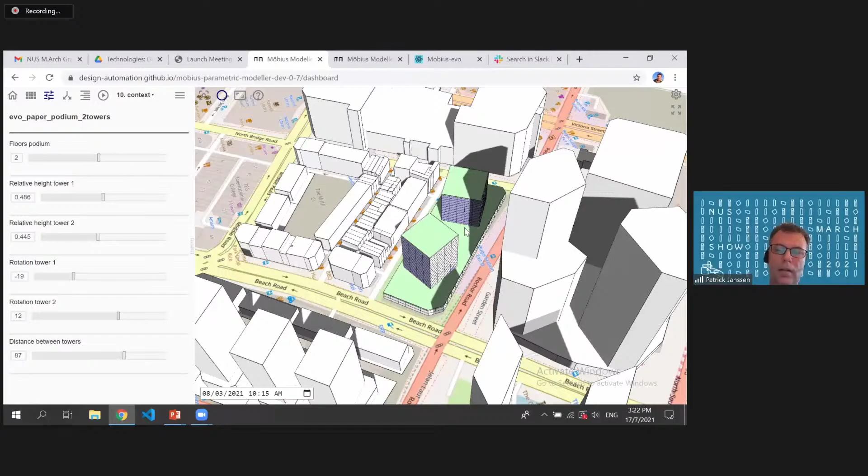So there are a couple of Mobius models here that we created as an example for this massing. Here's the one with 2 towers, and here's the one with 3 towers, and each one of these has some parameters on the left that allow you to change the rotation and the heights of the towers and things like that.

So the question for the evolutionary system is really which of these two solutions is better, but also for the particular solution, 2 towers and 3 towers, which set of parameters is better.

We're evaluating the views down to the Singapore River, which is an example in Bugis, so we're looking at the views coming towards the river. We're also looking at the solar radiation on the buildings, with the sun coming up in the morning from this direction and going down in that direction. And we're looking at the unobstructed views out of the windows. So we're evaluating all of that.

We're evaluating every polygon on the facade with 3 different criteria, and we're doing all that 1,000 times in 3 minutes. So that is the power of cloud computing.

So here we go back to Mobius Evolver. We can look at this run that I did previously. I'm not going to run it now because even at 3 minutes, it may take a bit long in a 10-minute presentation, so I'm just going to look at the results from my previous run.

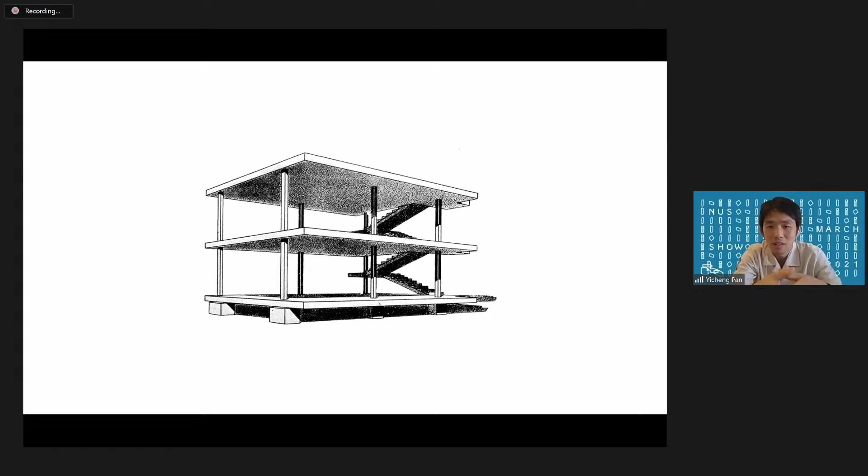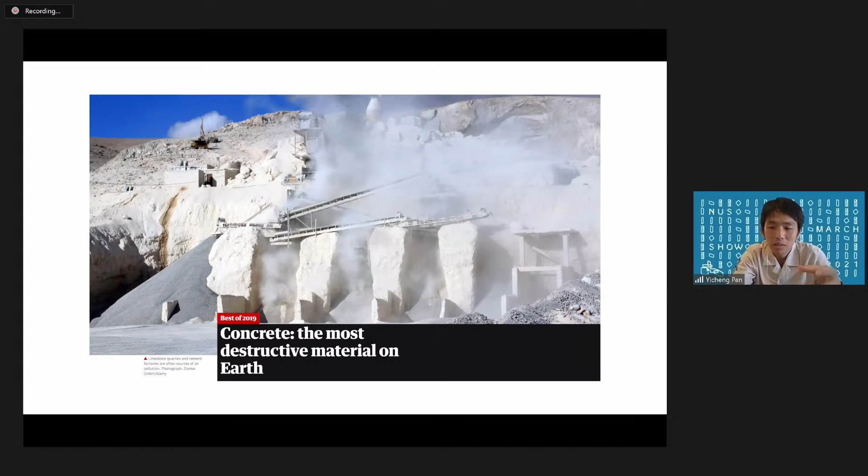It didn't really happen. In the meantime, in the past 100 years, we have been building mostly in concrete and steel. We've depleted a lot of resources, and now we are almost at the breaking point where if we don't do anything about it, we won't be able to slow down climate change. On the other hand, there's a severe lack of laborers, and Asia, for example, is also facing an increase in urban population. So on one hand, there's a huge demand in building, and on the other hand, a complete lack of construction workers. Not to mention that all these materials are not recyclable and are further damaging our environment.

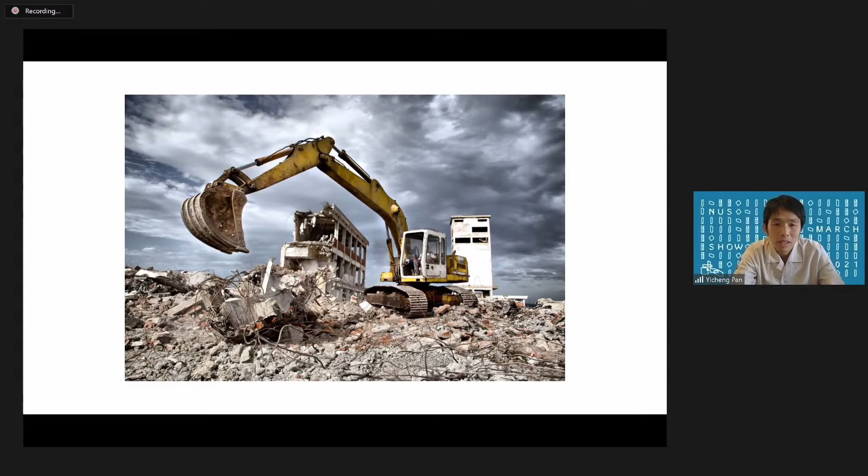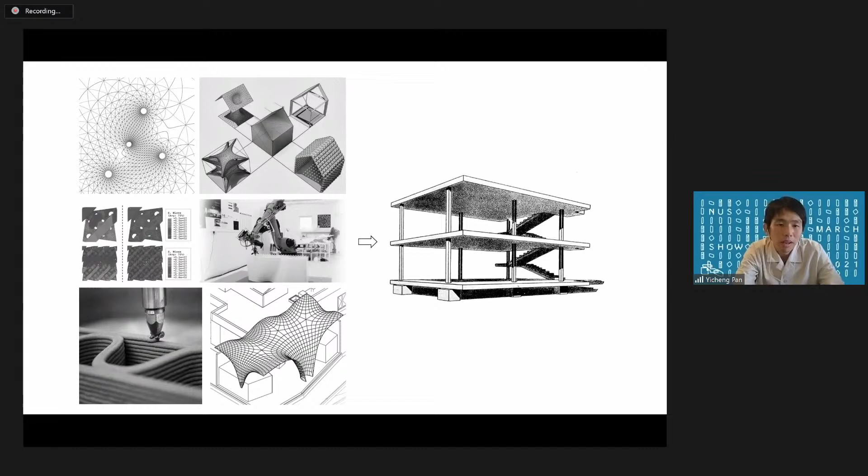So I think we are at this stage of rethinking the Dom-ino. And with the myriad of tools that we have now, computing and fabrication tools, we are able to perhaps create a new technological advancement in the realm of building.

So my journey basically started from simply making stuff. I was teaching at that time in 2012, 2013. I thought, why do we keep getting our students to do mock-ups and models in the workshop, but in practice they would have almost no opportunity to do stuff like that? So I started my practice with a workshop on the ground floor, housing a CNC machine and a laser cutter, and my design studio on the second floor.

Thereafter, we expanded the workshop with a partnership with Emily and started Superstructure. And now we have a few CNC machines and hopefully will be looking at robotics in the near future.

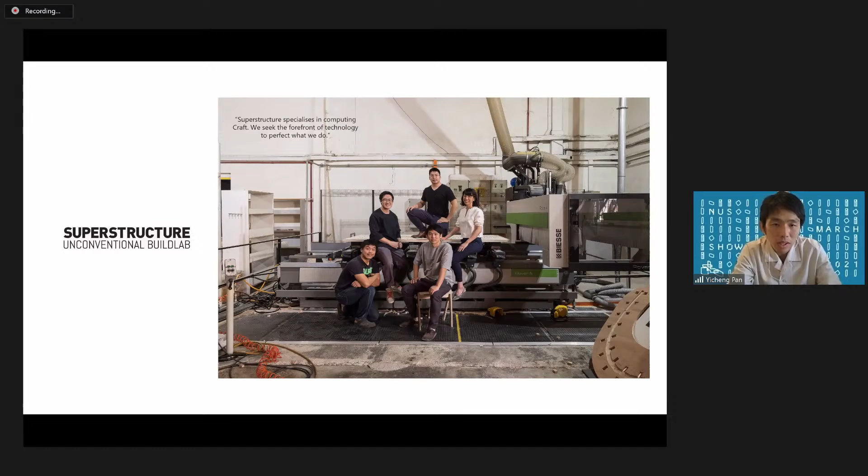How we have actually organized our workflow had been quite haphazard. It was kind of guided by what projects we have. But over the course of about 8 years now, we have done quite a bit of computation-to-fabrication processes, ranging from material experimentation, component systematization, and assembly documentation. This workflow, we are increasingly trying to streamline a bit better, and even setting up a computational team within our practice.

As I said, we started simply by making. I'd like to share my journey through a series of projects I've done since 2012.

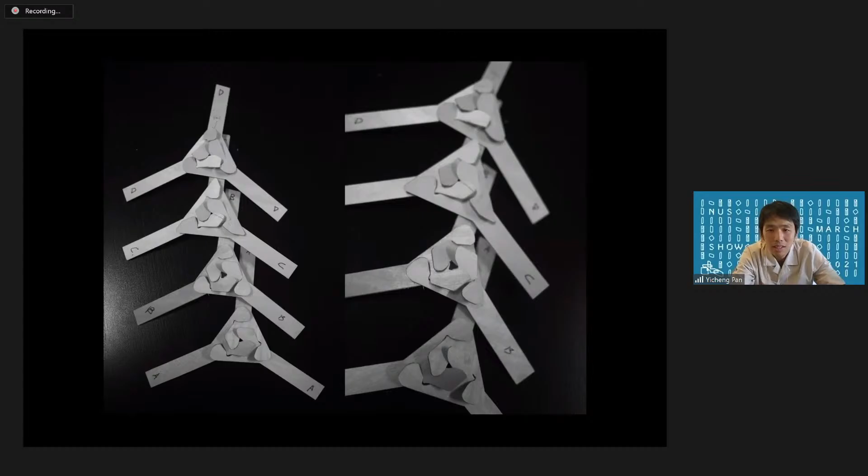The first one was for a grid shell in the Xtra showroom for Herman Miller. We started with playing with plywood. This was simply hand cut, and the process of fabrication was simply trying it out and testing it as a scaled model.

Finally, we were able to create this system of components and parts and start to modularize some of these elements, which then in this process created a new brick system.

We can't talk about digital fabrication without talking about assembly. Our very first attempt was very inefficient, simply designing the modules like bricks and laying them one after another in a particular sequence.

This process taught us a lot, and further on in the next iteration for the Herman Miller Pavilion, we decided not to use so many different parts. There were 4,000 elements here.

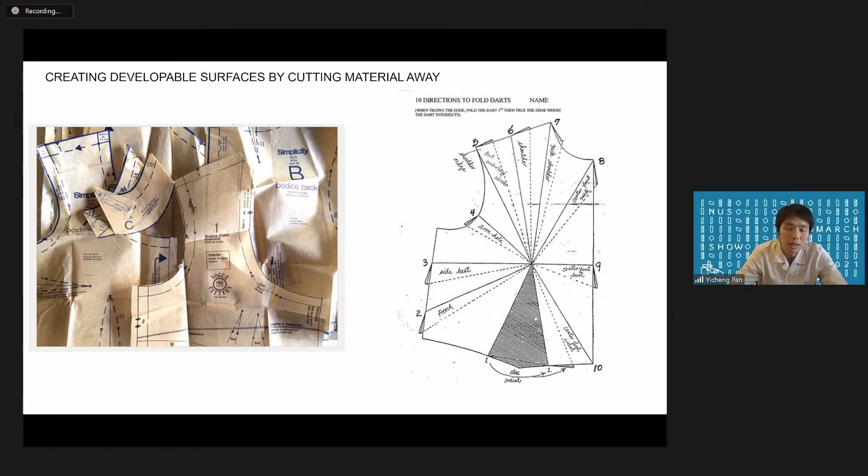In the next iteration, we wanted to look at ways of shaping plywood without heat bending, but at the same time reducing the number of parts. So we started to cut into larger pieces, full panels of plywood.

Then we used computer simulation to simulate the elasticity of the plywood and look at how it would bend when an operation is carried out. Finally, through this process, we created a parametric system where we can define the dart angle based on the final bending of the plywood.

The fabrication process was simply using this minimal surface and then breaking it up into 400 components. In this case, the structure is more than twice the size of the first iteration in the previous Herman Miller store, but we only have about 400 components here.

In terms of fabrication and assembly, it was quite simple. We did not need any skilled labor and it was pretty lightweight. In the end, the structure worked like a tensile membrane made of timber, simply hung up onto minimal structures. Here you could see a hollow section forming the arch, which acts like a hanger that you will pull up a sail.

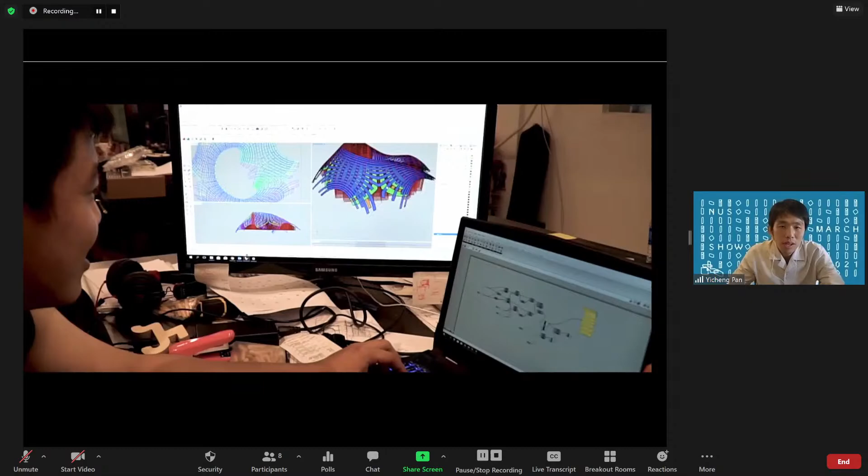Likewise, we do a one-to-one mock-up in the workshop. In this case, as I said, we try to learn from past mistakes, and we did a lot more in the factory environment where we could have a safe place to make mistakes.

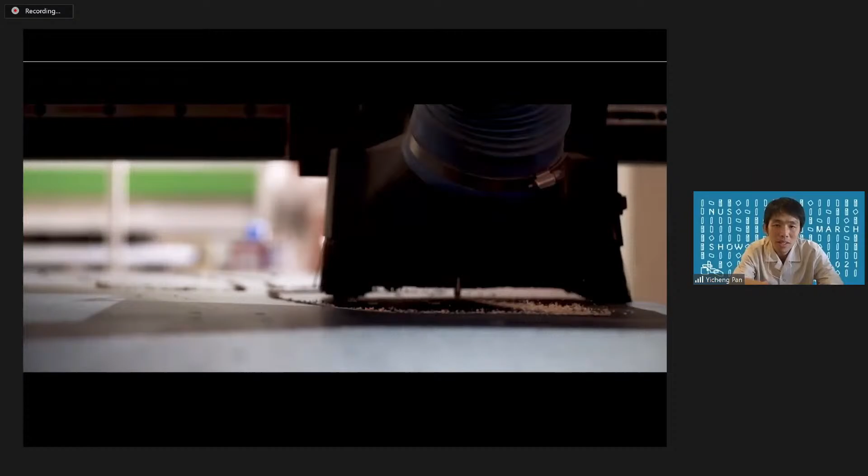This was really a good attempt because we only took 3 days to assemble everything on site. They were pre-assembled off-site in the workshop, and they come together really easily in a matter of 3 days.

The structure, because it was optimized with a kind of gravitational model, could carry quite a bit of weight, and we used very little material.

In order to create a volume like that, which is 10 meters wide and 5 meters tall, we only used one pallet of material when we demolished it. It was just one pallet.

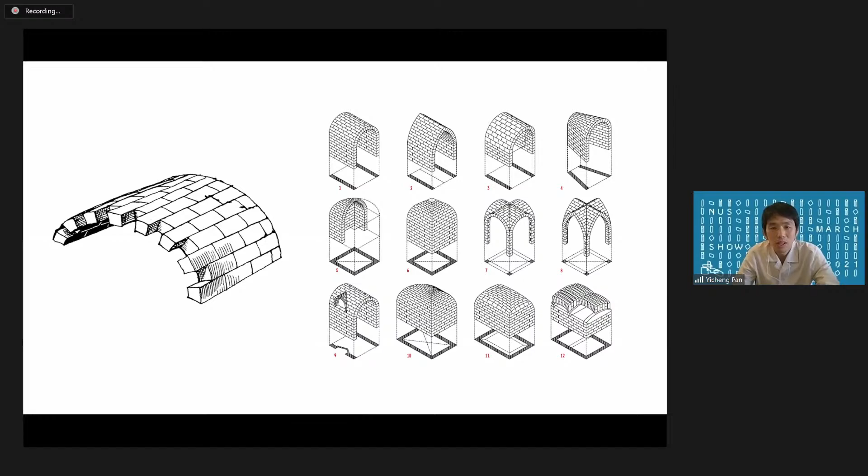Thereafter, we looked at how we could segment organic forms into planarized components. We started looking at this masonry shell, and we created a number of acoustic products. Right now, we are trying to make it into a product.

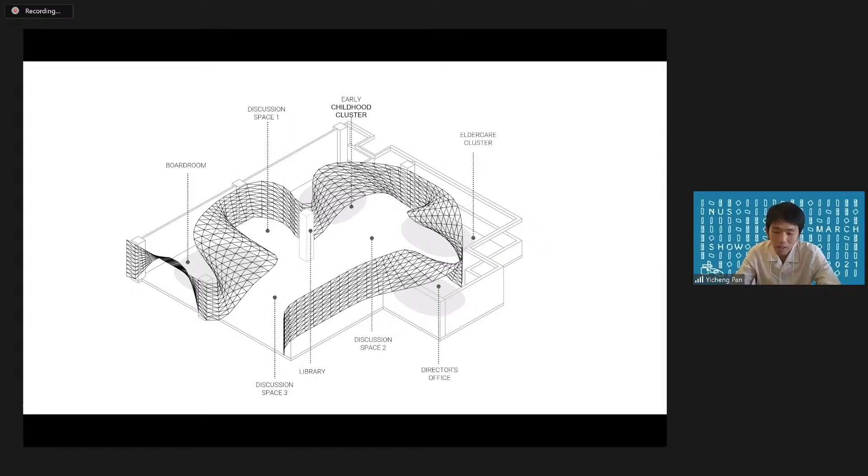At that time, it was a live project. This was for an office, and we wanted to put panels of plywood together.

In this case, we tried to simulate a finger joint, but with a bolt and nut to clamp it together so that the panels are in compression.

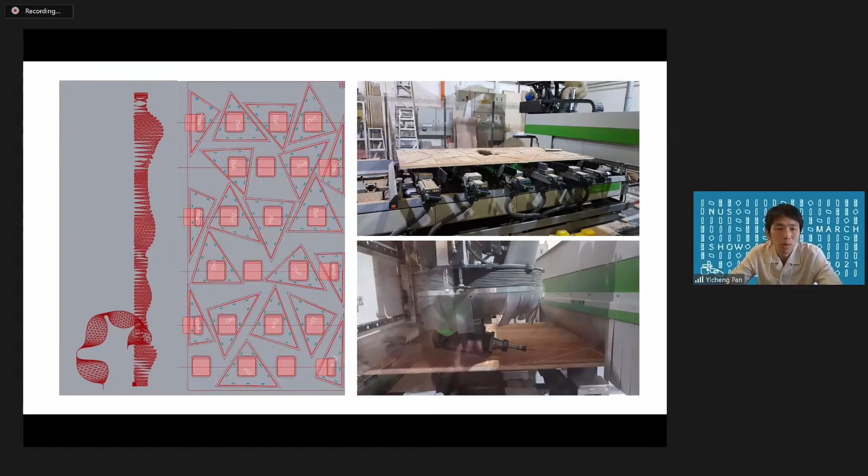Then the whole process was all digitally fabricated. They were pre-assembled into strips. Finally, when they went on site, it was going column by column, bolting these columns together, and naturally it formed the shape that was designed on the computer.

The whole process was a lot more streamlined now, and we started looking at ways in which we could expand this to other acoustic environments like a sound room.

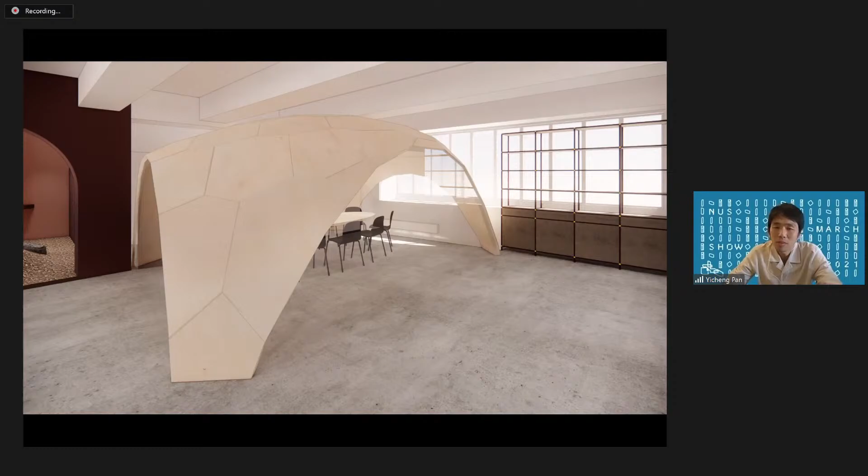This became now we are doing the third iteration of acoustic shell. This is for an office, so first of all, the process now is quite simple.

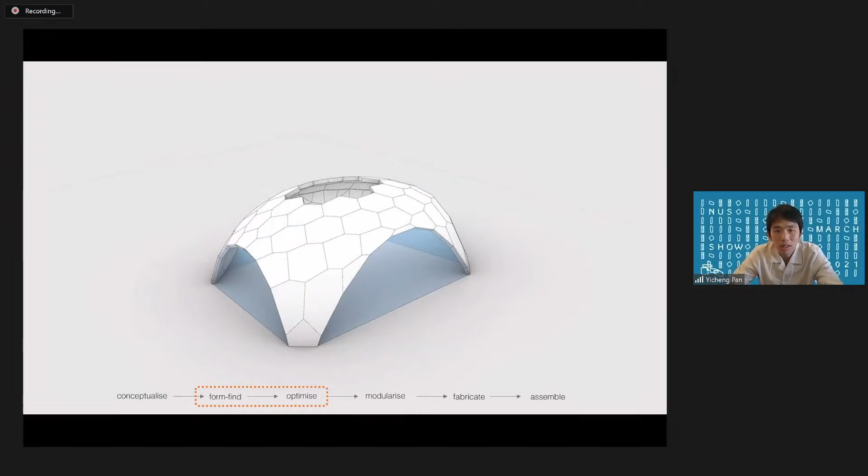We have written a system, a script, where we would first do a form finding, and this could be changed according to the size of the space. Then after that, we optimize it, make it flat, and create planar elements where the volume needs to be cut off.

With the help of an acoustician and our acoustic speaker supplier, we determine the positions of the acoustic panel and speakers. Finally, we start to modularize them and fabricate them.

This is a small mock-up, and finally we redo the process again iteratively to create a one-to-one.

So then we went on to compute for the fabrication. In this case, building up all the component parts, with the two paths weaved into the same system. The goal is to create one solid file where the input of the space comes into this system, and the output would be the fabricated panel. So it's almost like we are trying to create a 3D printer of sort. And they come with their own serial number, which would guide the assembly sequence as well.

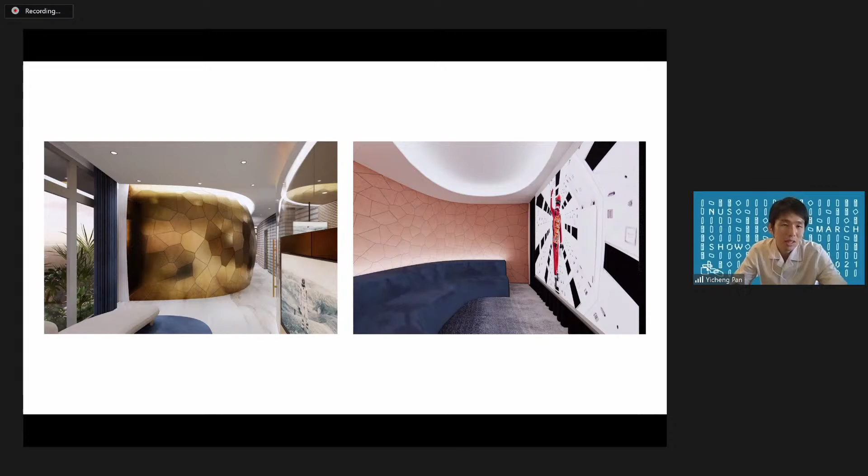So this hollow brick system now comes together in a penthouse in Sentosa. This is the back side where we would have infilled it with rock wool speakers. The good thing about digital fabrication is that you can really create a one-to-one translation from whatever you have conceptualized. So this is the rendering and the build. It was just recently completed about two weeks ago.

And finally, we are now gearing up to go larger scale into more building scale right now. So we started looking at reconstituted timber, primarily because mass engineered timber in Singapore still needs to be imported all the way from Europe, so it's not very sustainable. Instead, we should look at using regional plantation timber like rubber wood, and then compress them into really hard timber stock.

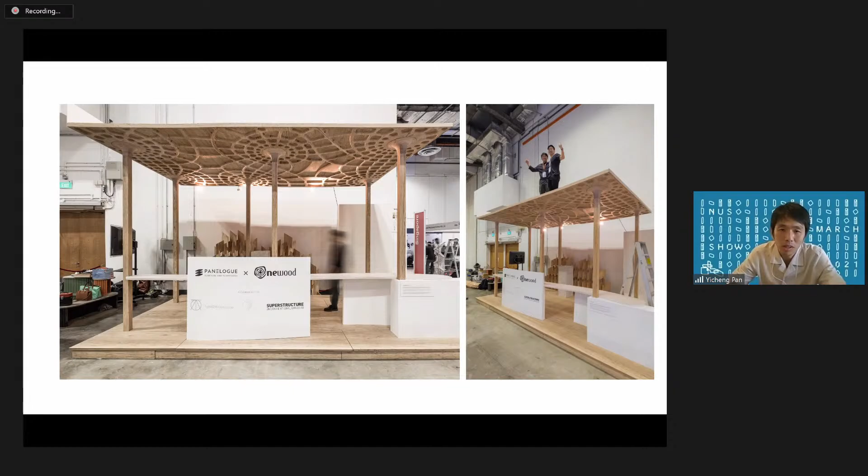So in one of our projects, we look at topological optimization where the column positions could be randomly placed, and then the waffle will kind of reorganize according to where the columns are. This was a kind of very small test back in 2019, October. And now we are looking at making them into standard components like floor plates.

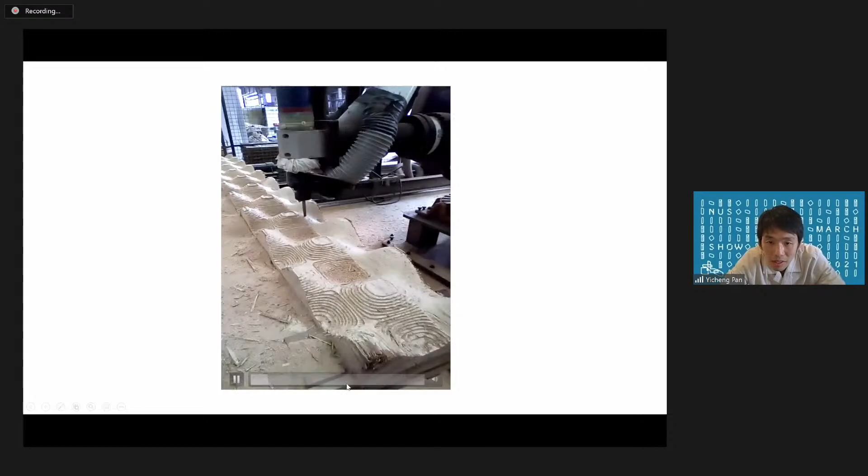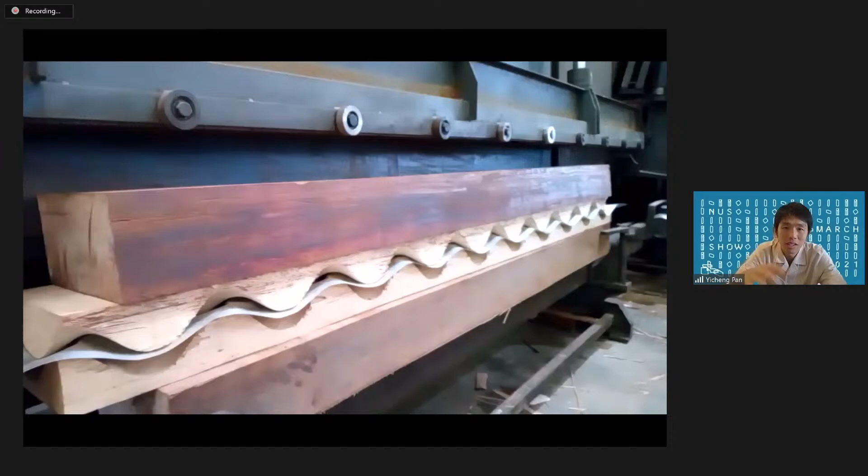Like floor panels and wall panels, which are load bearing. So this is for a two-way slab. This is the mold for pressing the reconstituted timber. And then subsequently, it's being pressed in this machine with 1,500 tons of weight. After that, heated.

And what's removed from this is a kind of waffle component, which is very lightweight. Two people can carry this. It spans 2.3 meters, and is about 150 mm thick.

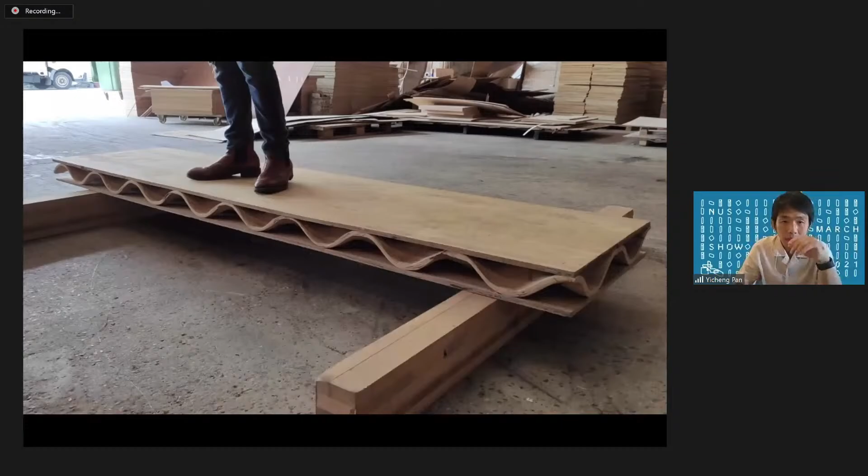And we could use this cavity to run cables. Obviously, there are going to be acoustic issues, which we will then address with acoustic sheets over and within, and acoustic foam within these crevices. And we were in the process of test loading this up to 1,000, 1.5 kilonewton. And now with this load and deflection, we are trying to optimize it a bit more, looking at this as a system that could replace our precast concrete panels or precast floor slabs.

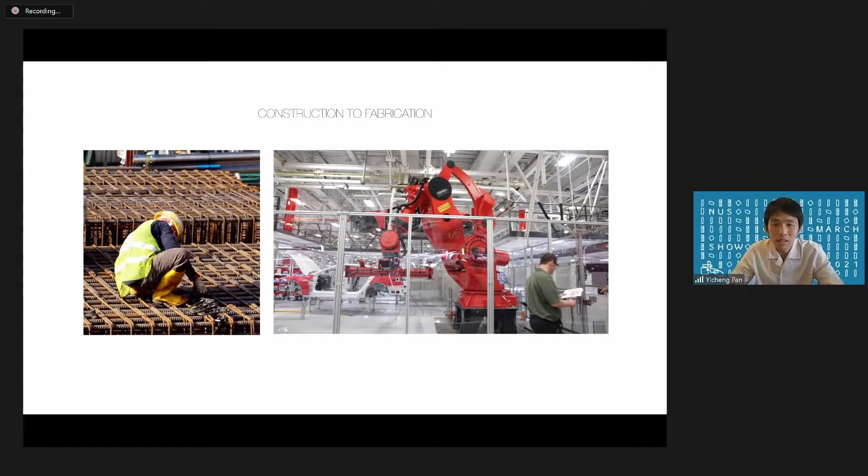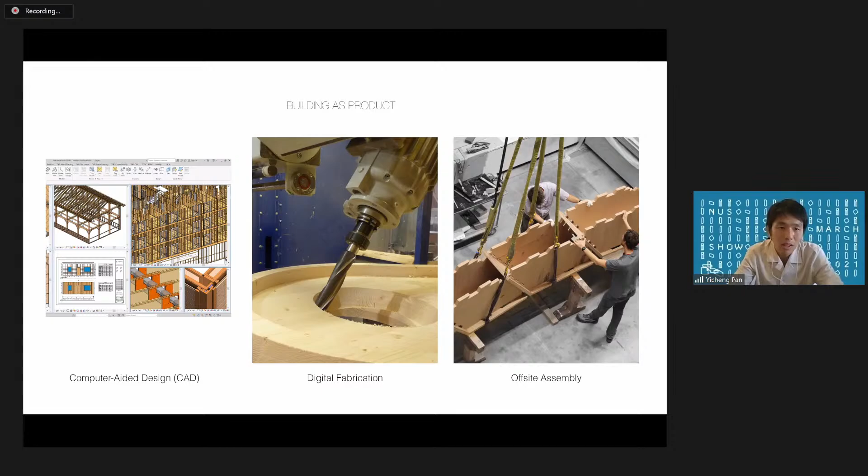In a sense, I think what we intend to do is to look at the entire built environment holistically. And finally, I think this is the time that we, who are trained as architects, could reclaim the correct meaning of the word architect, which is master builder, and transform the industry from manual construction to fabrication, from on-site in situ construction to off-site, very clean factory environment type of fabrication. And with all these tools combined now, we can be in full control of the whole building process and look at the whole building as a product, and reduce a lot of wastage.

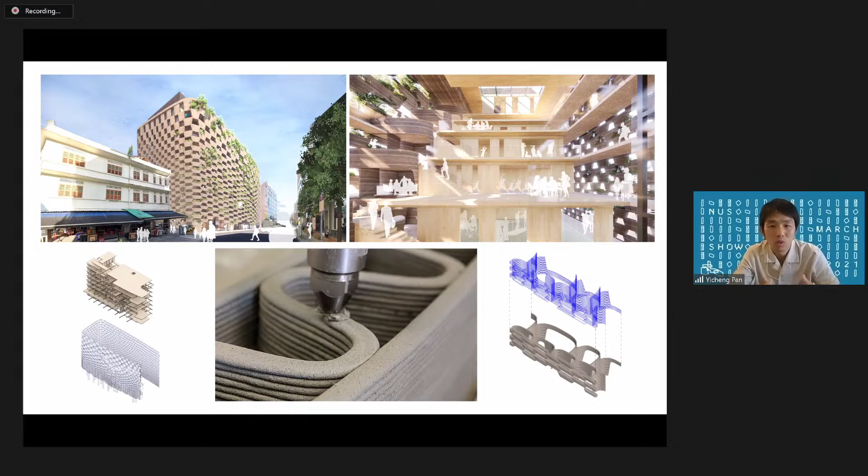And I will encourage the graduating class to try adopting these technologies in their work when they get into the industry, because the architects need to lead this technological transformation instead of the contractors or the fabricators, because the architect will be an important person to orchestrate all the systems together to form a holistic product. Okay, thank you very much.

Thank you, Yicheng. It was really amazing to see the comprehensive process of employing digital fabrication into architecture. And next up.

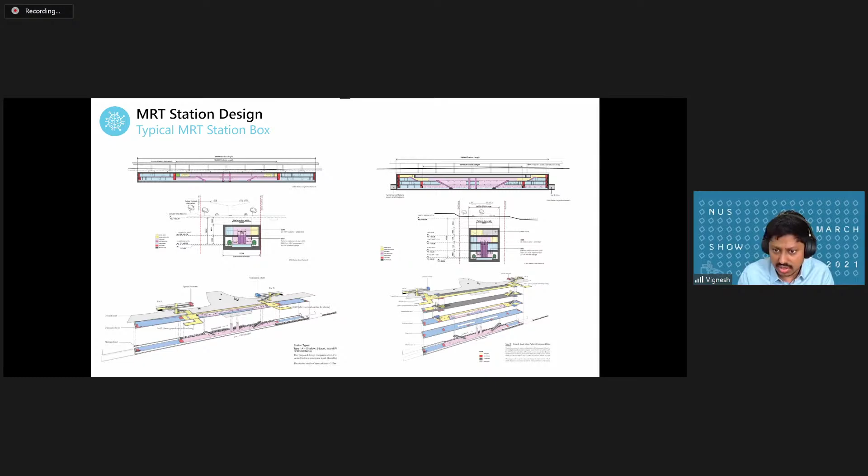This is an MRT station box, for the Thomson line. We had to design about 12 stations, all very typical underground stations, and they are completely rule-driven, because LTA gives you literally a rule book of how you must do a station design, station box design. So we figured, you know what, this is such a rule-driven design, we might as well automate the generation of this inside ArchiCAD, which was our BIM platform at that time.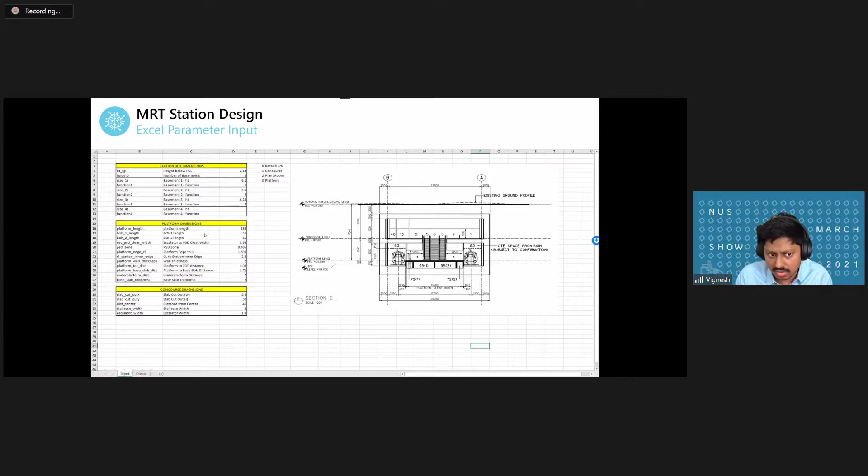So what we did was enable our designers to just control the generation of the BIM model from an Excel file, basically. What they would do is just change the parameters of each of these different items on your model through the Excel file, and then the entire BIM model will be generated for them.

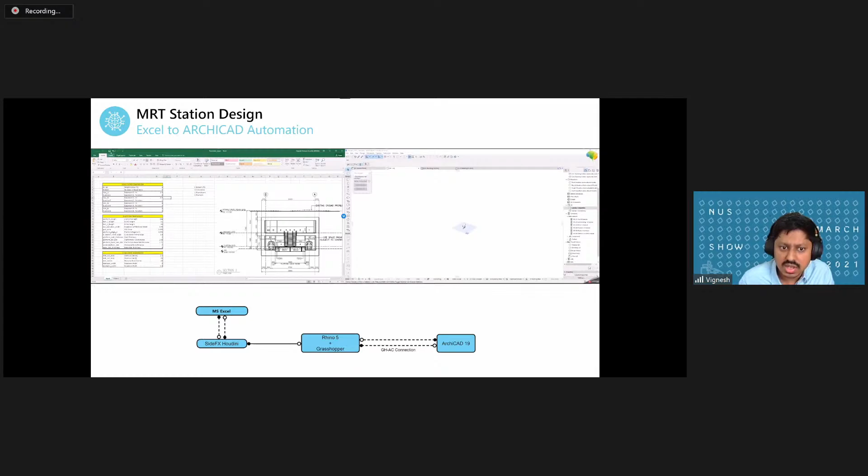The designer would just go and change the height, the width, and whatever the parameters of the escalators, the distance between them, and then they would run a script that we wrote. What the script does is take those parameters and create a parametric nimble BIM model using Houdini and Grasshopper.

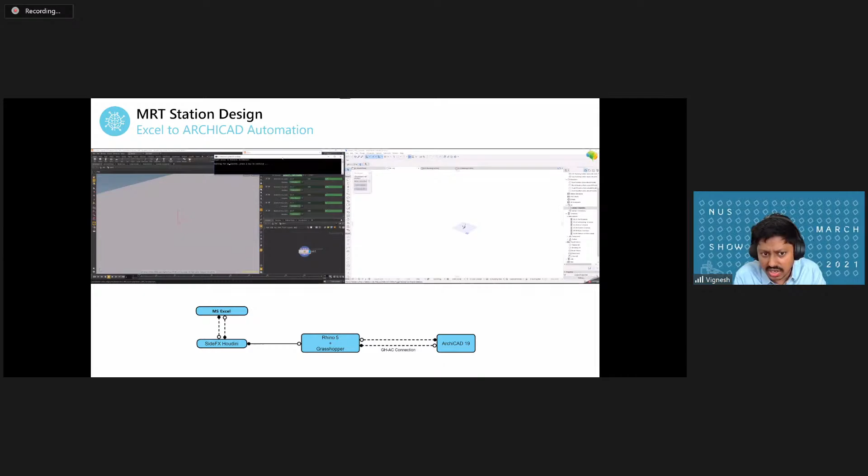This model then pushes into ArchiCAD to be a fully native BIM model. So this skeletal model, we are using Houdini as the parametric engine to develop this because it was quite complex to get done. But what Houdini produces is just a skeletal model.

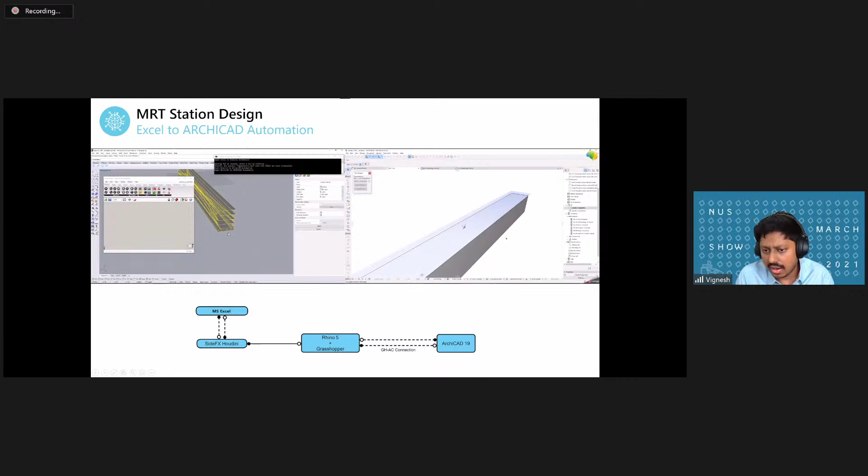This skeletal model is then automatically imported into Rhino and Grasshopper. As soon as this is imported in, ArchiCAD is looking for data to come in, constantly looking for data. And as soon as it recognizes that Grasshopper has some data and geometry, it converts that into a BIM model.

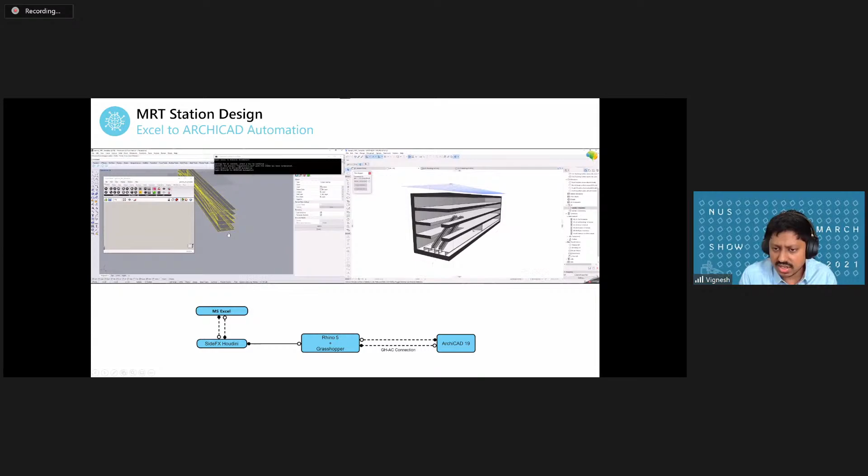This is native BIM model. This is not a mesh or uneditable stuff. This is actual native BIM model that has escalators and everything, floor slabs and walls, all of this done. So if you look at this, this is automation, yes, but the process is still driven by the human because the human decides exactly what each of those parameters should be.

So now I've shown you two examples of the spectrum, one more towards machine intelligence, one more towards human intelligence. And as I said, the part where we are more interested in is the augmented intelligence part.

So that being the philosophy, what we have done in Gensler is create a platform called Nform. Nform is a platform that allows us designers to actually create some of this intelligence as a tool. So we have a few tools created for them.

gBlox is a tool for architects, for architecture and urban design projects. GStacks and GFloors are tools for interior designers. And GMP is actually a library of materials that all of these tools can use to create amazing renderings. So I know we're running short of time, so I'm just going to show you how gBlox works, and maybe on another occasion I'll walk you through the other two.

With gBlox, this was a tool that we did about a year back. This is a plugin to Rhino and Grasshopper. And the way the tool works is it provides data insights to the designer while we are working on the BIM model, while we are working on the Rhino model.

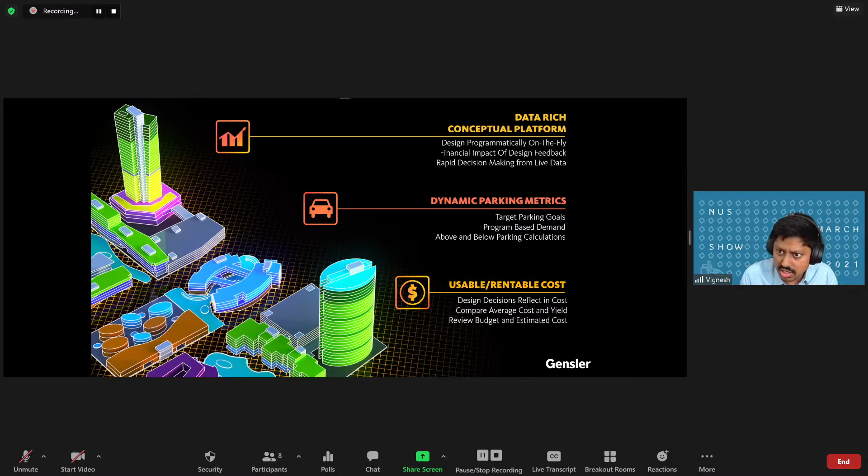So this is a data-rich conceptual platform wherein I can actually program on the fly. I will know the financial impact of the design. I can get rapid decisions, make rapid decisions based on live data. We will be able to know parking goals.

We are able to calculate cost versus yield and how much the budget is. All this right from a dashboard that comes in front of you while you are designing it.

So typically what would happen is designers would design something, stop designing it, and have to go to Excel to do all kinds of different calculations on GFA, site area, total cost, and yield, on parking numbers and all that. It was actually a very disruptive workflow.

While now what we are able to do is make sure there is no disruption to design at all, and all these metrics are shown to the designers while we are designing.

So this is a YouTube video. You can go search for gBlox and you'll be able to find this video.

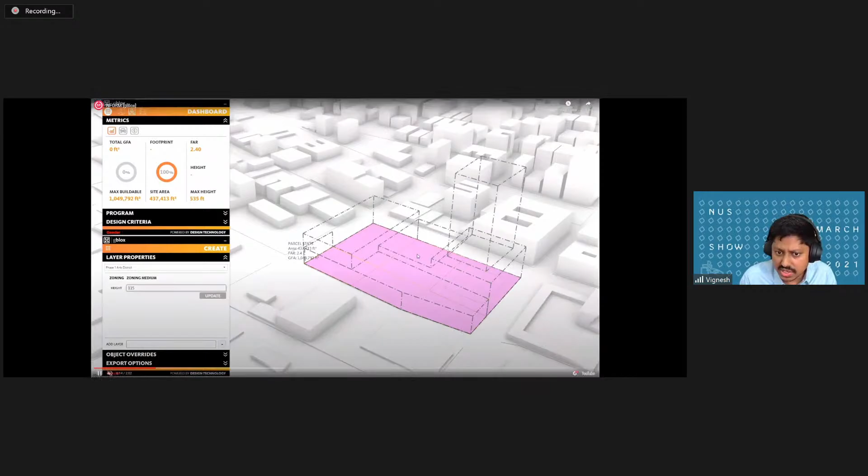So one of the first things we do is set the envelope for that particular site. The minute we go outside that envelope, the tool is going to say, hey, you are breaking the local compliance code. So all the designs that we are doing are already compliant.

There is no need to run a compliance check later on according to standards or the local building codes, because this is already done while we are designing.

We are able to create all kinds of different programs, assign target areas, and then you can watch whether you are able to hit the target areas or not. The ratio between these different programs is also shown.

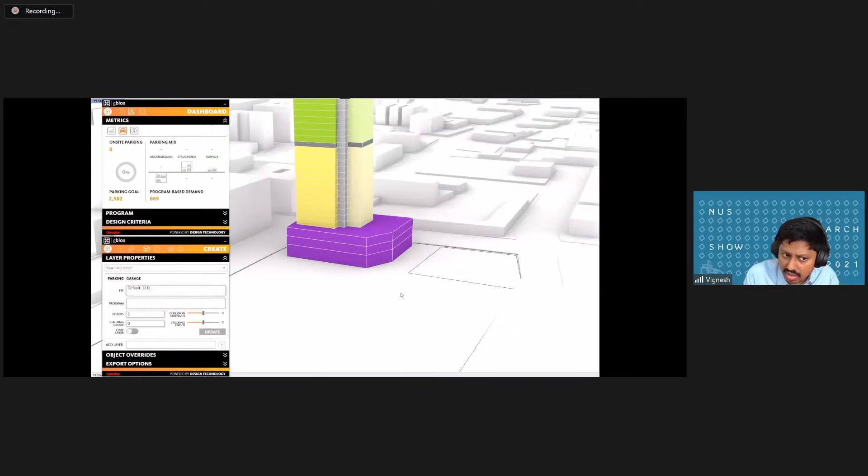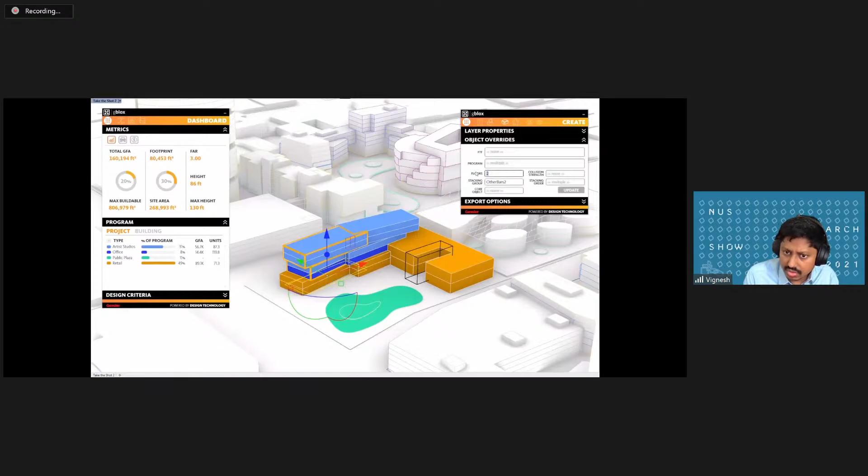You can create any kind of parking, underground, overground, on the surface, and all these numbers are automatically calculated. And of course, you are able to rapidly make design changes and create design options, and then compare and contrast the different designs at scale.

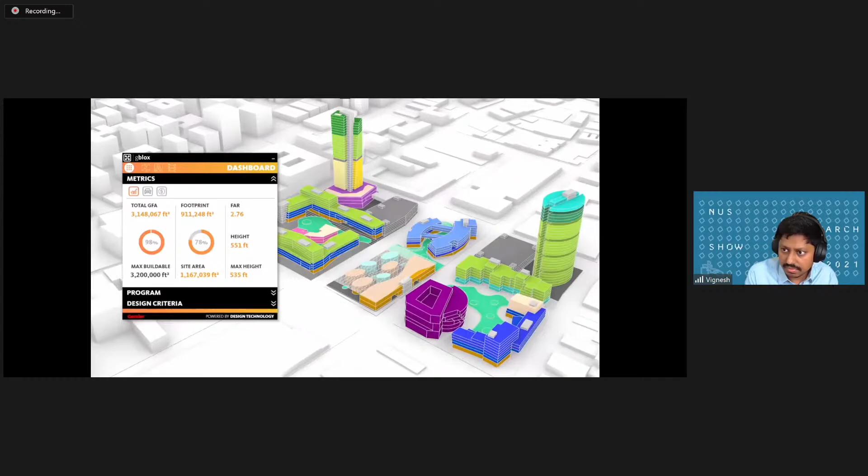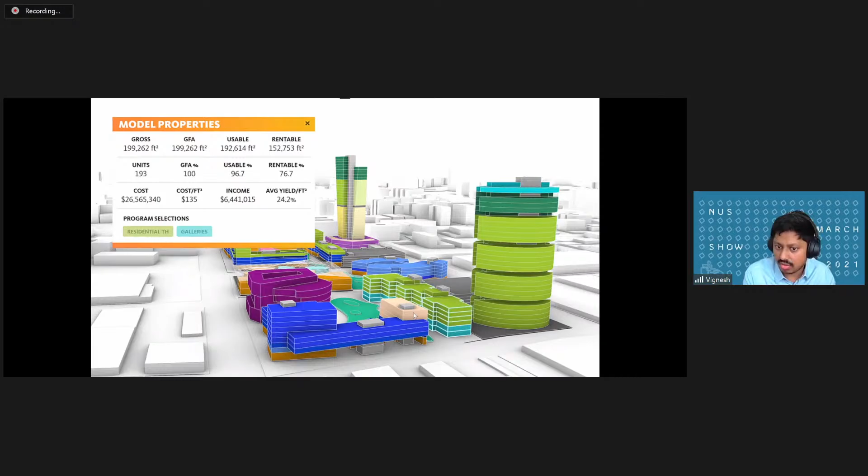And of course, financials. So while you're doing it, you're also able to have financial data, adjustable inputs. This is what I meant, where the data and insights that the machine is able to provide while you're designing it is very useful to the designer, because he still retains the design control of what is being drawn on screen, but he leans onto the machine to give him insights on data.

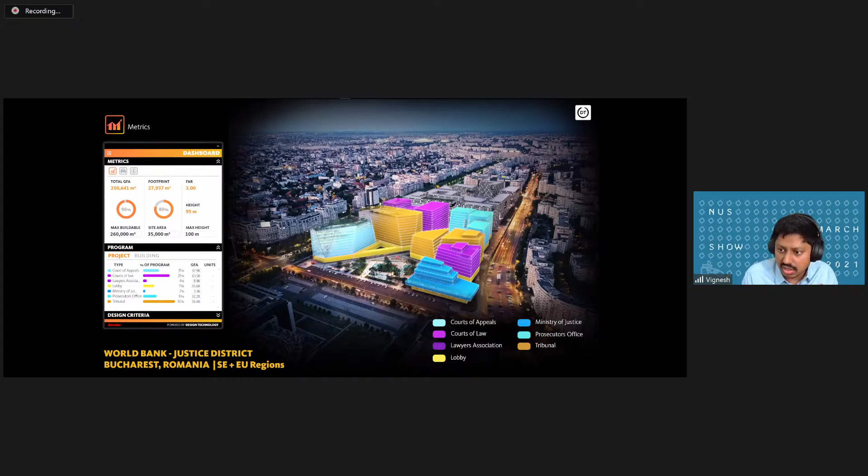This is almost a standard tool at this point for us for all our architecture projects. We have used it on many projects, small, big, it doesn't matter. This is something our clients absolutely love, because we involve them in the design process using this as well. Typically in a client conversation, the client would say, hey, how about we do this? About a year back, you would say, let me get back to you on this. Now what we do is say, okay, let's check it out right away. The difference for us is being able to bring live data and live feedback to the client on the call without having to keep going back, because the data is just there in front of you.

So these are some projects in China, some projects in Singapore, some projects in the US, where we have used it in many different ways to advise our clients on what's the best mix of retail versus residential, where can you get the best yield.

And then we combine this with simulative technologies for running environmental simulations, like sunlight hour analysis, daylight analysis, wind analysis, solar irradiance, understanding PV output. We use a process by which our design exploration is in Rhino and our design deliverables are on Revit. The entire interoperability is taken care of through automated tools on our end. The designer is not redrawing anything in BIM at all. He just takes the Rhino model and it auto converts into a BIM model using custom tools we have built. So it's a very much performance-driven design method, but it is also a process where the design control is still with human.

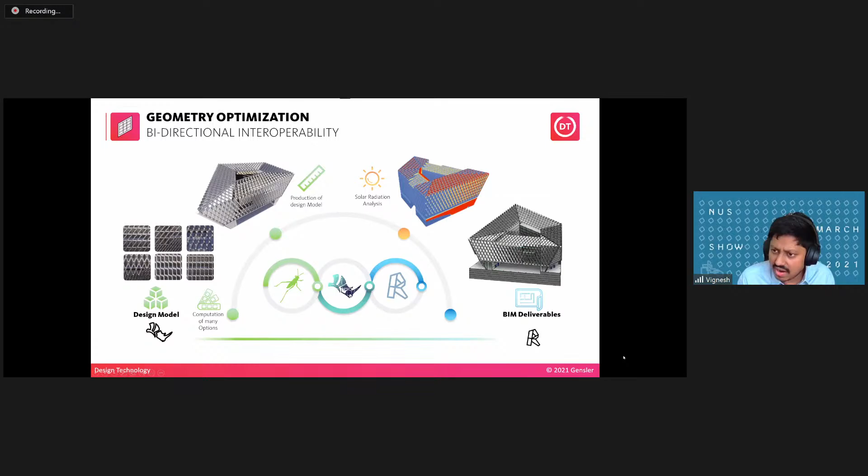Okay, do I have more time, or is that it? I think time is running short, so we'll have to move on, and we can mention more things during the discussion in a later stage. All right, so that's it for me. I just wanted to show you one tool. We'll see if we have more time for the others, or maybe a different forum for this. Thank you, thank you a lot, Vignesh.

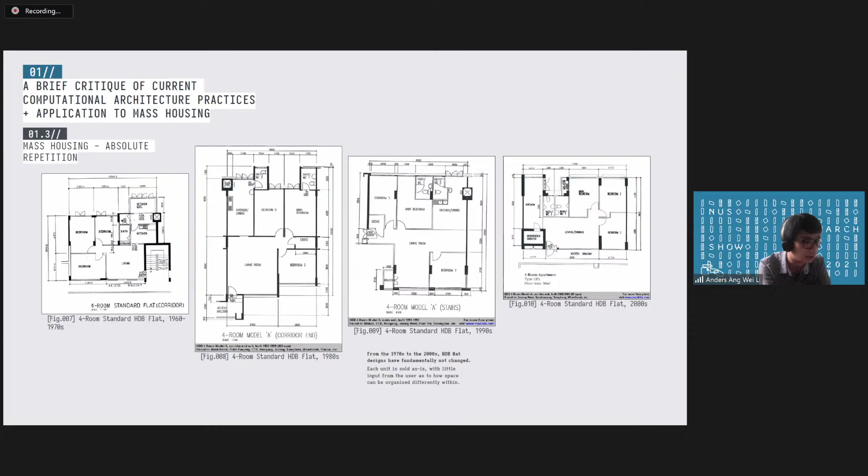One of the ways this affects us, everyday people, is in mass housing, right? Because of this lack of radical shift, it carries over and can be seen in the way we design our mass housing today. And if you see the plans of our HDB flats, they have not really changed from the 1960s until 2000s. Even worse, they're just copies of the same unit repeated over and over again.

And this has been the way that we design mass housing, even though we have switched from plain paper drafting to using computers in our workflows. So the question is, how can we move beyond that? How can we move beyond just using parametric design for skins, for pavilions, for energy simulations? And how can we move beyond that old modernist Fordist model of absolute repetition where every unit is the same, a mass-produced kind of space? How can we take computational tools to the next level beyond this?

So I've been looking into some ways that we can do that in terms of breaking away from old modernist spatial logics. How we can move away from certain ideas of architecture where when we start the building, we start with a tabula rasa. We wipe the slate clean. Start with a flat ground.

Can we move away from that and use new data like from satellites, from terrain analysis, from 3D modeling to simulate our terrain before we start working on it? And how can we use tools of the computer, discrete objects, and then repeating them throughout in different ways to come up with very complex but still buildable architecture?

Also looking at certain philosophies and certain concepts that have been brought up in the past, such as Bernard Cache's objectile, where instead of designing a singular object each time, you're designing a set of relations. And how these relations can allow you to create variants of the same design over time.

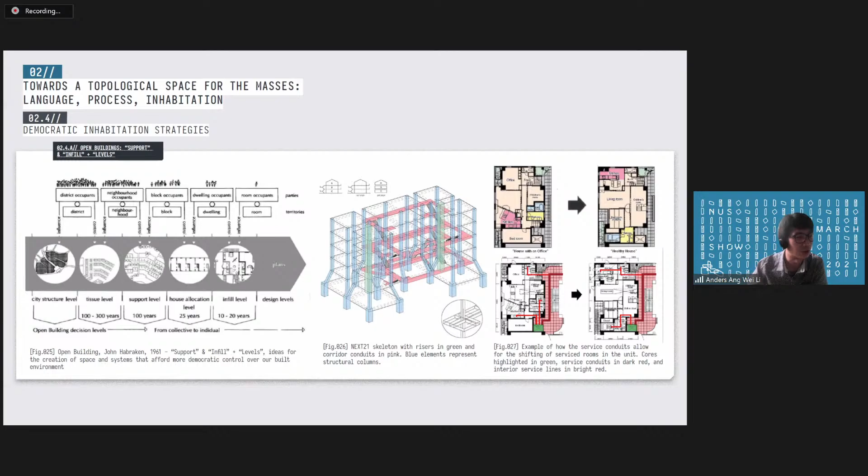And also looking at how other democratic inhabitation strategies can occur, and how platforms can come in to play with this to allow people to have a say in the way they design. So as a demonstration of how we can use all these computational tools, I'm focusing on the site of Tengah. Basically what I'm trying to do is I'm going to take URA's master plan for Tengah and develop an alternative that uses computational tools to analyze and then propose architecture on the site.

So allow me to share a small video with you. This video will be a workflow of how I've used these computational tools. And in a way, they demonstrate how we can use computational tools to consider certain phenomena, things like the terrain from satellite data, things like how water flows in the site.

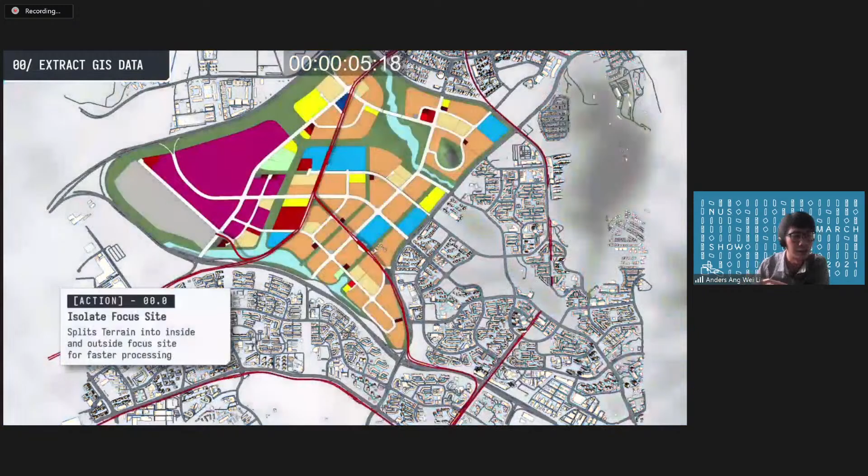So over here, we're doing a simulation on the water flow and figuring out where we can draw rivers throughout the site, figuring out how we can connect the existing connections that run through the sites. We can figure out what the edge conditions are, we can do network analysis, and where are the areas on the terrain that we can inhabit, and what are the edge conditions.

Are we going to separate the site into parcels so that we don't have a massive block, but instead separate it into smaller blocks with perforations here and there for services, for networks, for lift cores? And mapping that into a mesh that allows us to create a grid of sorts, that eventually transforms into the architectural form.

So what you see here is just me creating grids of space. They are eventually extruded into cubes, and stacked together to form this architectural space that is in 3 dimensions.

So this is just a few decisions that I make along the way, like, okay, maybe let's connect the top of the building so that we can have some sky bridges here and there. So it's running through the same process again, considering all the edge conditions, all the solar conditions, and generating it for you.

And then identify where structure goes, and also doing some sort of spatial analysis to understand where are the denser areas, where are the areas with the highest height. And then using that data to scatter my cores, where the lift cores and stair cores can go. How do we connect each core using shortest path networks so that they're very efficient? And how can we locate which are the areas where I need a bigger core, which are the areas I need smaller cores?

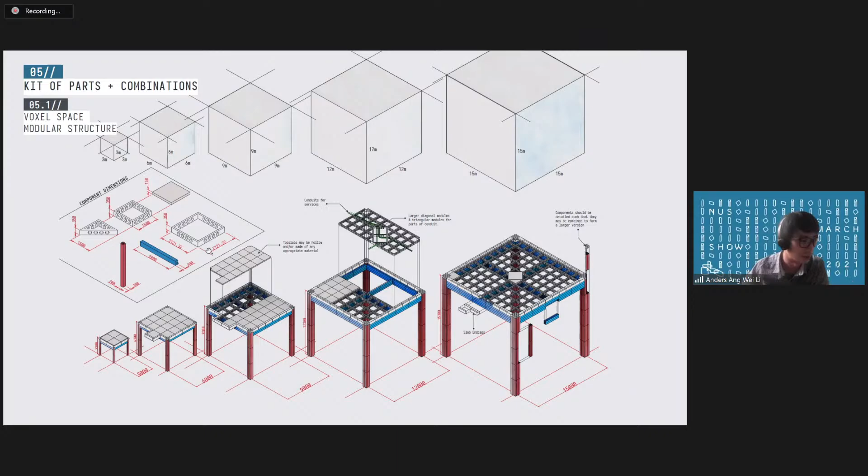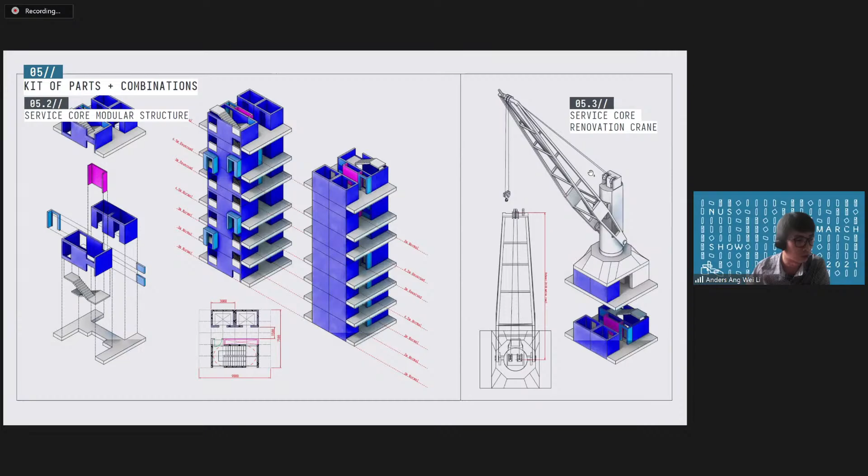Because each volume is a cube in itself, we could bound each volume with just some modular parts - slabs, waffle beams, columns and beams - and then combine them to form the structures, as well as a modular system for the service core, as a way to also construct the rest of the architecture later on.

So what you saw earlier on was also very complex, and you wouldn't expect someone to have the model in SketchUp and try to draw residences on every single one - it would take them forever. So what we could do is provide some sort of digital support platform for people to come in, be it developers, architects, or users, to analyze how this space works.

Things like how the rain flows across the site, how wind flows across the site, what's the amount of solar radiation the space gets. We can combine all these spatial qualities to figure out where are the spaces that are great for public spaces, where are the areas great for office spaces, and we can use it to map spaces that are great for different kinds of programs.

And then later on we can come in to say, okay, this is the area where we should have commercial, this is the area where we should have public spaces. So it aids in that process of deciding where things can go.

On top of that, perhaps we could also open up this platform to the users in a way that is some sort of like a Sims-type but multiplayer, where we receive this empty structure and then people come in drawing where they want the units to be. So in this example, what you're seeing is the end result of people drawing in where they want their units to be.

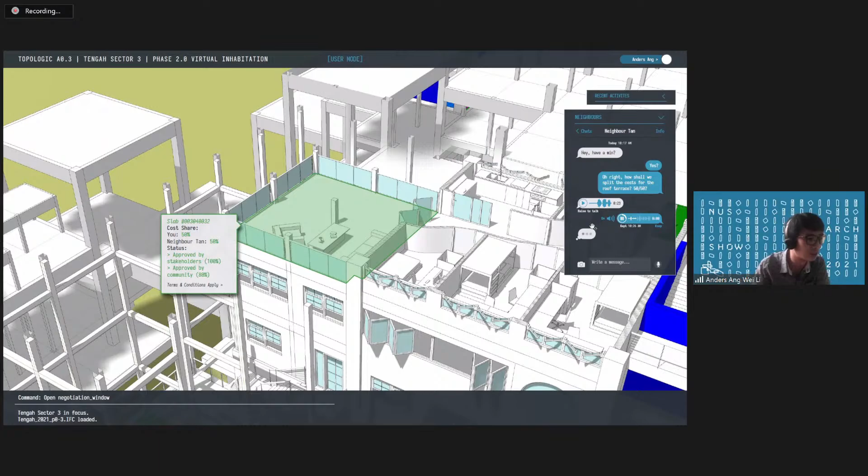And you realize later on that all these units are very different. You can come in to use this platform as well to negotiate with your neighbors. Let's say perhaps these two units share the same slab - someone uses it as a terrace, someone uses it as a roof, and perhaps they can share the cost of it as well.

And you can use the same system to understand what happens if you want to change the space over time. So this is the initial stage, and then after modifications. What happens in the modifications? What are the negotiations that need to happen?

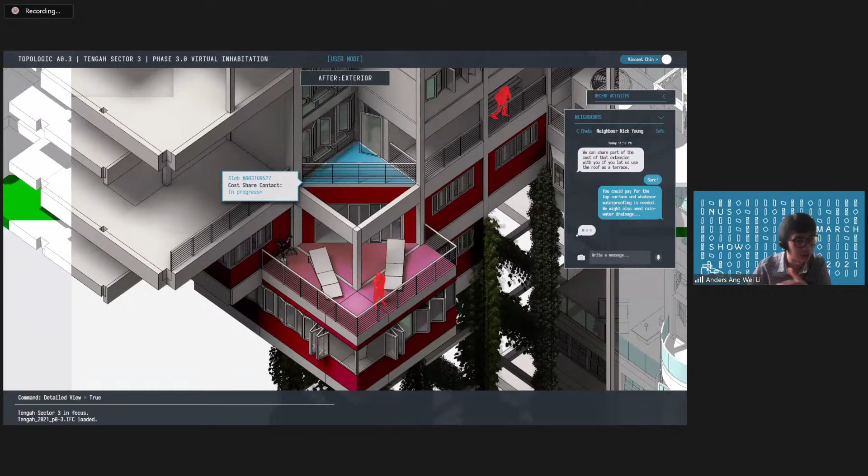So for example, in this case, this guy wants to expand his unit, and then he creates this extra slab that can be shared by the neighbor, and then they can do some sort of negotiation to understand what needs to go on with the cost sharing issues.

And then you also flag out issues with things like the fire code, which are all considered in the model - issues like how do you run all the services that are needed, and how do you reroute them later on. So at the end of the day, this whole model allows you to create this whole variety of spaces automatically.

And the platform also allows the users themselves to have a say in how these designs are changed over time, right? And the whole workflow kind of works like this.

What we saw earlier is just me making the decisions to design an algorithm that comes up with the whole skeleton of spaces, and then people come in to fill in the space. After filling the space, after the contractor builds it, after they modify it a few times, we take the usage patterns.

How do they use the space? What modifications do they make to the space? What are the shortfalls? And then we feed it back into the design process.

We take this example, variant 1.8, where we have just a structure like that. And then we realize that perhaps people want to build it over the river. We can take that data, feed it back into the design process, change the algorithm later, and then have it consider what happens if you want to include building over the water bodies.

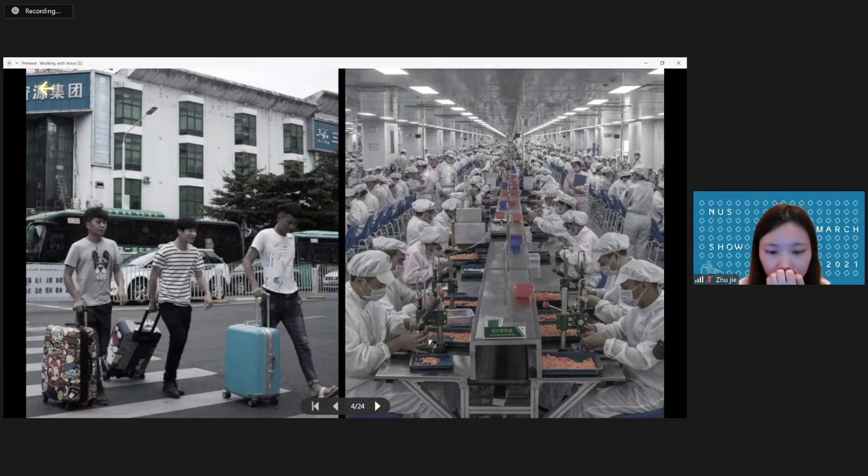They are called Sanhe Dashen, which means Sanhe gods. The Sanhe gods were originally aspiring migrant workers from the countryside who came to Shenzhen aspiring to live a better life. However, most of them could not find a stable job and became Sanhe gods.

Each morning, at 5 a.m., they would be waiting outside the talent market, fighting for the limited day job slots. Those who manage to get a day job will be sent to factories and construction sites that need extra manpower to pick up rubbish or do other tasks no one wants to do. When they can't find a day job, they will sleep on the street and survive on offerings from others. Some of them starve to death or even go crazy.

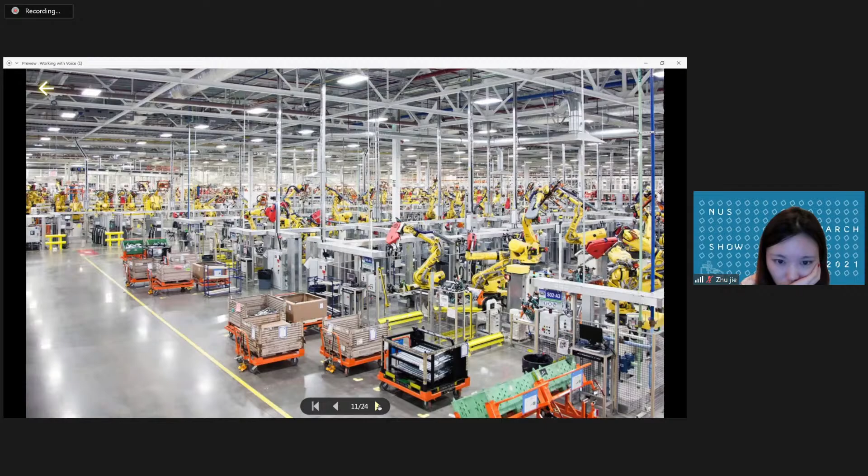The community has a culture of work one day so that you can play for three days. They call themselves gods, as they have transcended the desire for climbing up the social ladder, living a carefree life without goals nor aspirations. But the harsh truth is that since 2018, factories such as Foxconn plan to replace 80% of workers with robots in the next decade. In the near future, there will be more Sanhe gods and less jobs.

Many Sanhe gods have accepted such a life. Song Chun Jiang, for instance, sold his identity card on the black market for urgent cash. Without his identity, he could never take up any permanent jobs ever again. He is also in heavy debt from internet loans. There is no way he can ever return the money.

Yuval Harari worries that the problem of the useless class is not just the loss of jobs or income, but more a sense of despair when you are locked out of the only perceived way of a meaningful life, which in many people's case is about earning money, gaining status, etc. You will lose your hope in life and find it harder and harder to get up in the morning to do anything.

So these Sanhe gods will only find work when they are hungry and eat the cheapest noodles. They stay in dirty clustered internet cafes and waste their days away in online gaming. The scary fact is that with the AI revolution further widening the social gap, we can even expect those originally

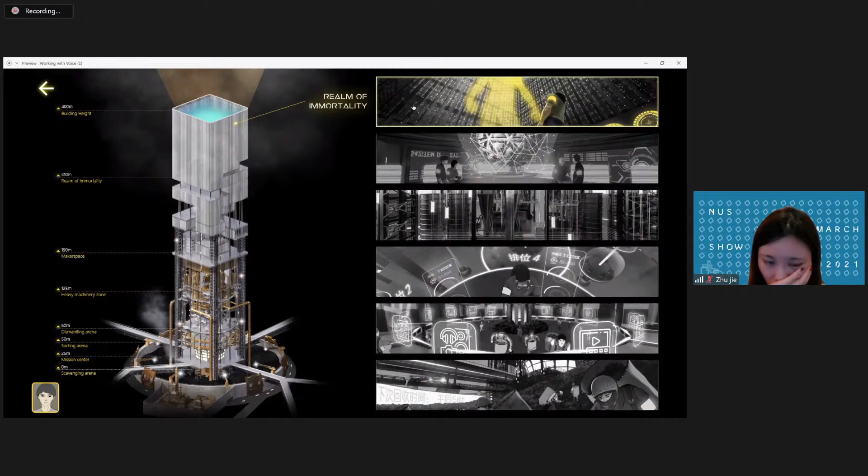In fact, right now 70% of the e-waste in the entire world end up in China, and the majority are dumped around smaller cities near Shenzhen.

So the tower is made up of 6 sections, and each section is designed to house specific activities that correspond to the current social level of the resident. As you accumulate social credit score, higher levels will be opened up to you, so you'll have more choice on what you want to do.

And when you reach level 100, you will be able to go to the top where the digital heaven awaits. The very first space that is open to the newcomers is the e-waste dump, which is also the scavenging arena.

Every morning, trucks carrying e-wastes will dump them to the ground. Scavengers take up quests in this area to pick out the valuable e-waste from the dumping ground. The quest in this section is to collect as many valuable e-wastes as possible.

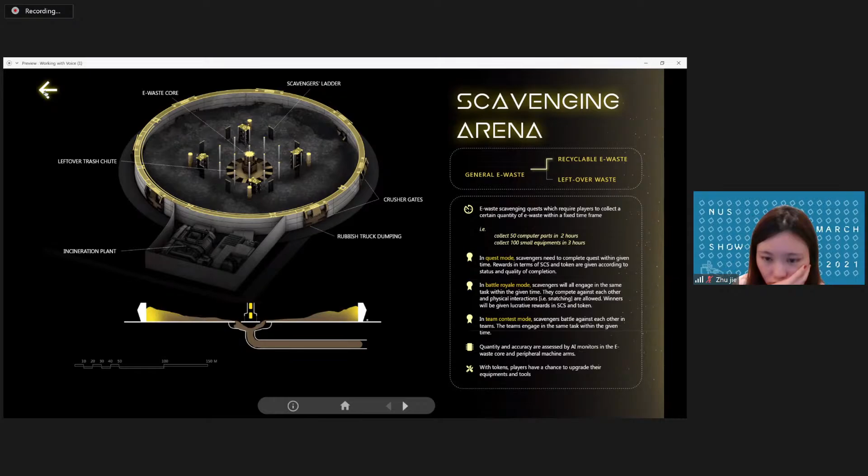And just like in computer games, the residents can choose different difficulties where they will receive higher rewards for the harder quests. For example, if you are strong and fast, you can compete in the Battle Royale mode where you earn additional rewards for outwinning other competitors.

Residents can redeem their rewards to exchange for services like haircut or food. But most importantly, they get equipment that will make their effort easier. In this case, these are various gears that help in scavenging.

The second space open to residents is a sorting arena. The scavenged e-wastes are moved upwards in a central pipe.

Sorters have to classify the e-waste by running around and throwing them into their specific chutes. All the sorted e-waste will go up the peripheral suction pipes to the next space, which is the dismantling arena. The third space opening to residents is the dismantling arena.

For instance, monitors need to be dismantled into CRT, circuit board, cables etc. In this area, there are mobile capsules on the outlets of the sorted waste pipes. The capsules rise from the bottom to the top.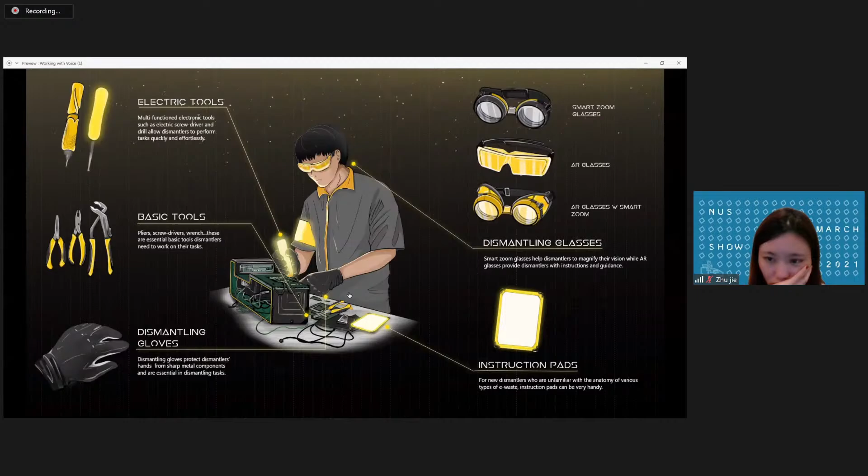In the quest mode, residents work in the capsules to dismantle the e-waste within a given time. The more experienced ones can also choose to compete in team races, where each capsule is a team, and the cumulative progress of dismantling determines the speed of the capsule rising. Residents gradually receive various equipment which makes the dismantling process easier.

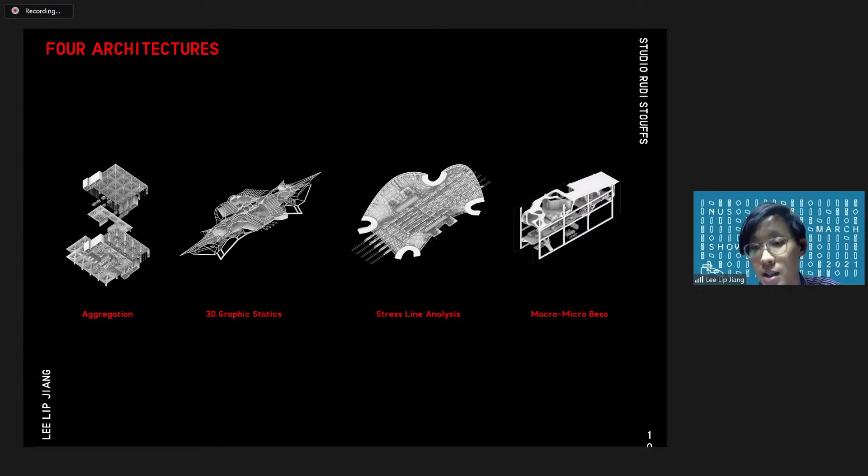So these are the four architectures: aggregation, 3D graphic statics, stress line analysis, and macro and micro BESO. These are the processes I utilized.

First of all, for the discrete aggregations, I created a factory, and these are made from individual components that have gone through topological optimization.

So for example, from this I'm able to generate my discrete elements, constructing these as meshes and then utilizing them as columns, floors, and walls.

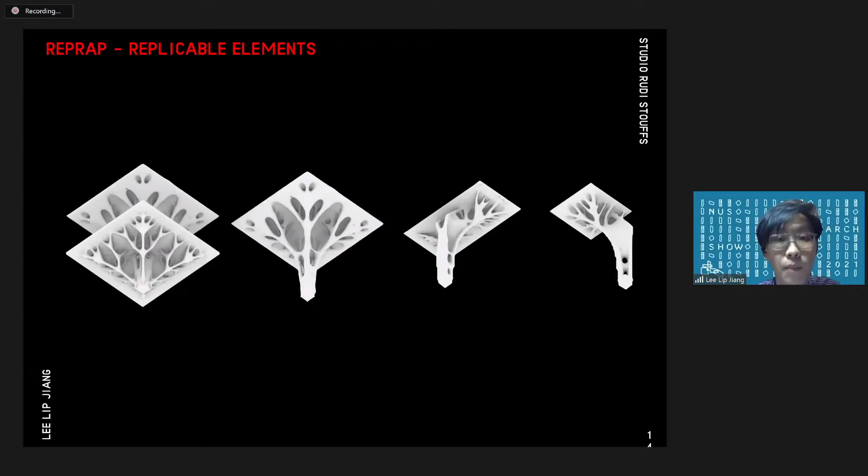And then what actually happens here is I can pull them together into making this factory floor space, put in office floors in the mezzanines, put in spaces for delivery trucks. And the main space is, of course, a production floor that can self-replicate.

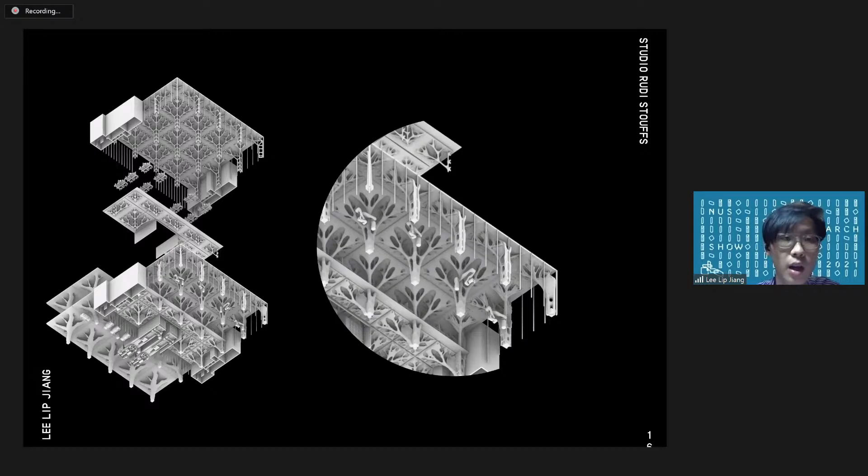So the space is designed to allow for the self-replication of more of these discrete elements to create something like a RepRap printer, which is a self-replicating 3D printer.

So this is how it looks like from the inside, viewing over to the production floor and from the office, the main alleyway where the trucks can drive.

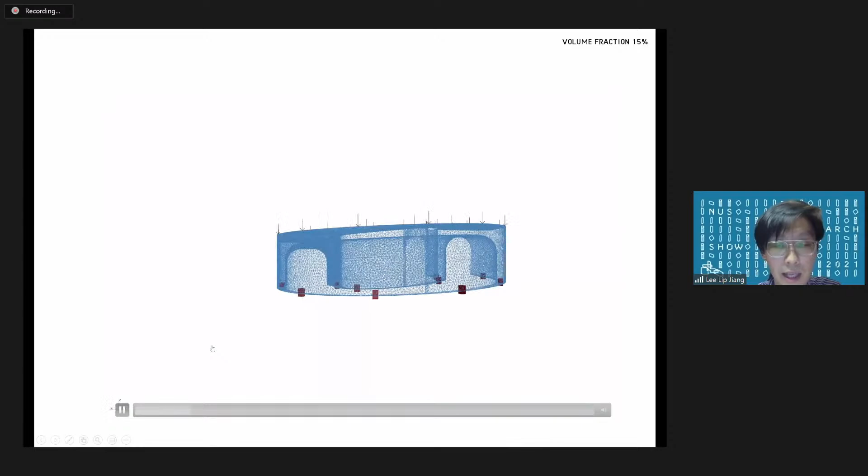And the ramps themselves are also optimized, utilizing the Mike Xie's Ameba solver, which allows me to do more complex forms using the same sort of idea. This reduces material and adds material where it is required.

Hopefully this isn't too laggy. Okay, and this is what the ramp looks like.

And next, I also explored 3D graphic statics, which was devised by Philippe Block. Essentially, it's like a physics free body diagram, but instead of doing it in 2D, you have it in 3D, so form diagrams and force diagrams are represented by polyhedra.

So as an architect, what we do is study these tools and think about how we can utilize them to carve out spaces.

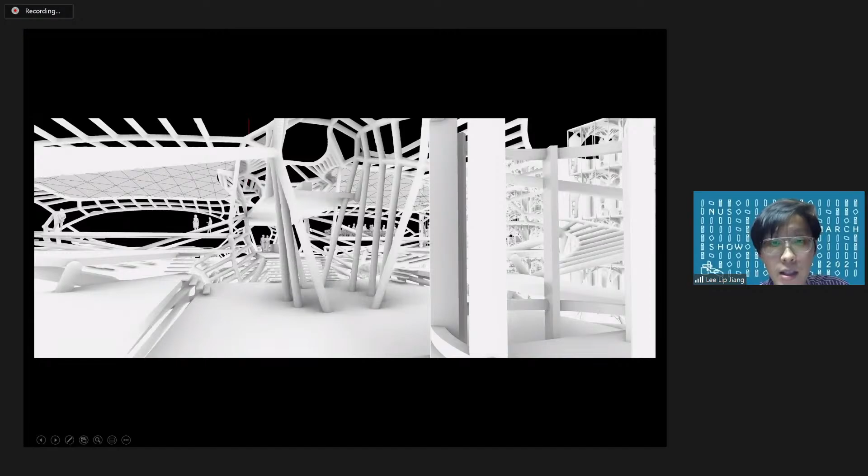The form is quite complex, but it all represents efficient transfer of forces within its structure. You can have a gallery floor that sits within it, a section through the space, and this is the view of the production areas from the viewing areas, and the view from underneath the space, a white canopy of a cafe. So you can think about how different spaces become utilized.

Thirdly, I also utilized stress line analysis, in this case to create a high-speed rail. This is influenced by Pier Luigi Nervi's famous Gatti Wool Factory, where he extracted the isostatic stress lines from a shell structure. This system is good because you can utilize Millipede or Karamba solvers to extract the principal stress lines from any 2.5D shell structure.

What I did was devise a way of utilizing these stress lines to turn them into usable geometry. This large span is optimized to bring forces down toward each of its four corners. Here's a view of how the railway can be utilized from the inside.

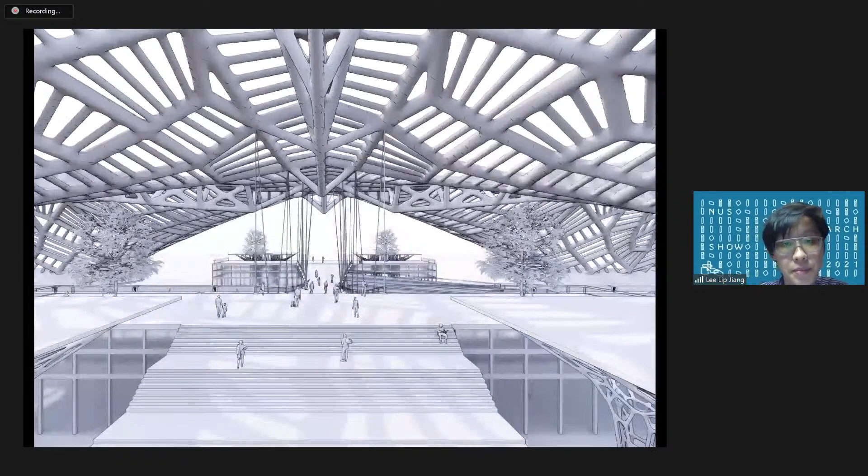And finally, I also utilized BESO in my own methods, which I call macro to micro BESO. One flaw is that I cannot have very detailed optimizations because I lack computing power, but I could probably solve that with Patrick's use of AWS.

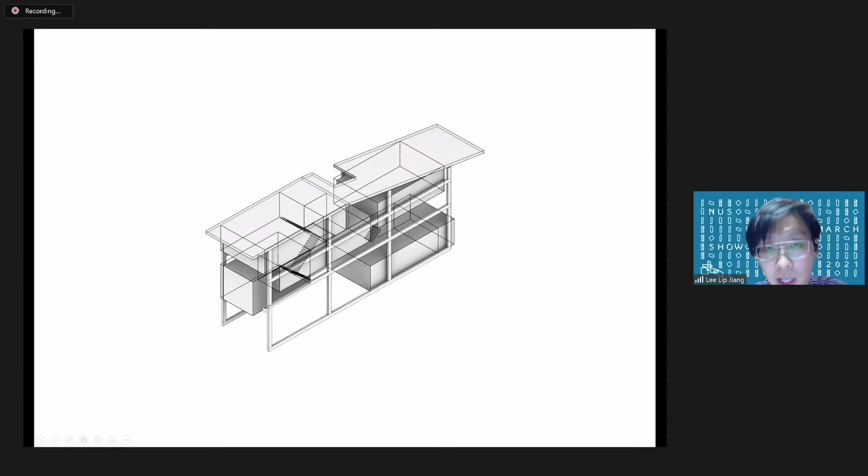So what I do is envision this as a parasitic space that sits between these structural frames, like a new house built in between two party walls with a structure like this. I'm trying to latch these spaces onto the structure, so the architect can define where the spaces are.

Then we define the large domain and see the macro topology optimization. You can see that forces might be running down this way, this way, and this way. And this is my first study.

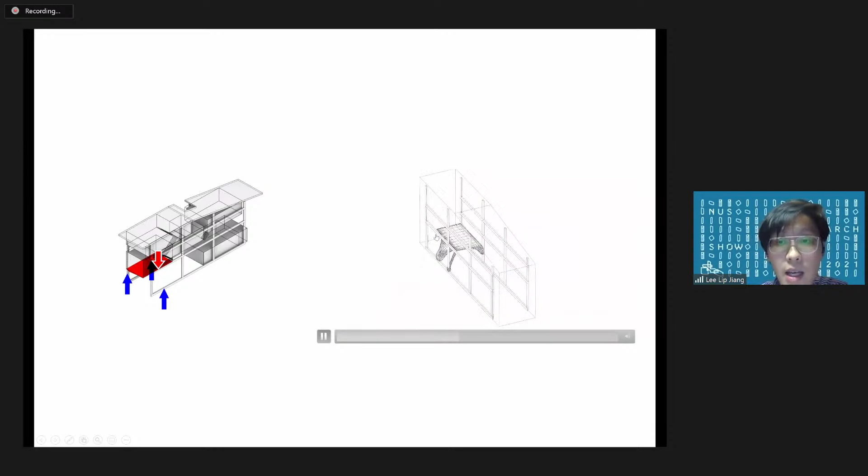Afterwards, I break it down into smaller spaces and optimize each individual space, utilizing lessons learned from the larger optimization. This helps me solve the resolution problem I had.

So these are the individual spaces being optimized, and all together, this is what it looks like.

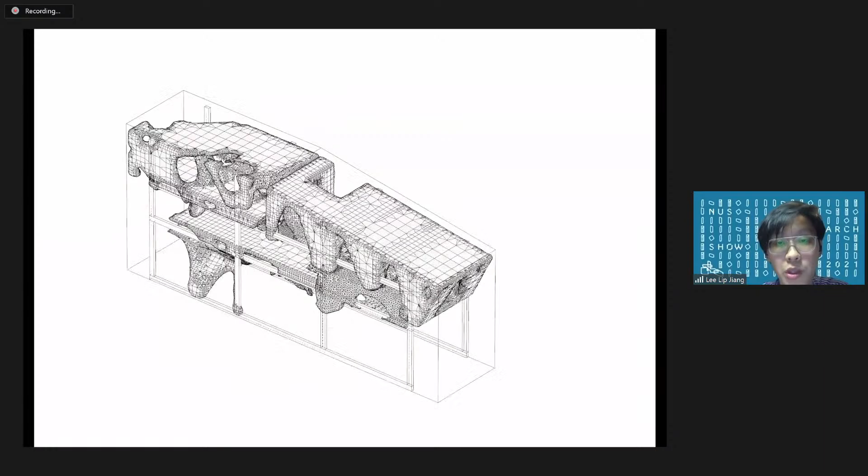Sorry, I realize it might look laggy on your screen, so I'll let it play for a little bit, and I'll play it one more time just in case.

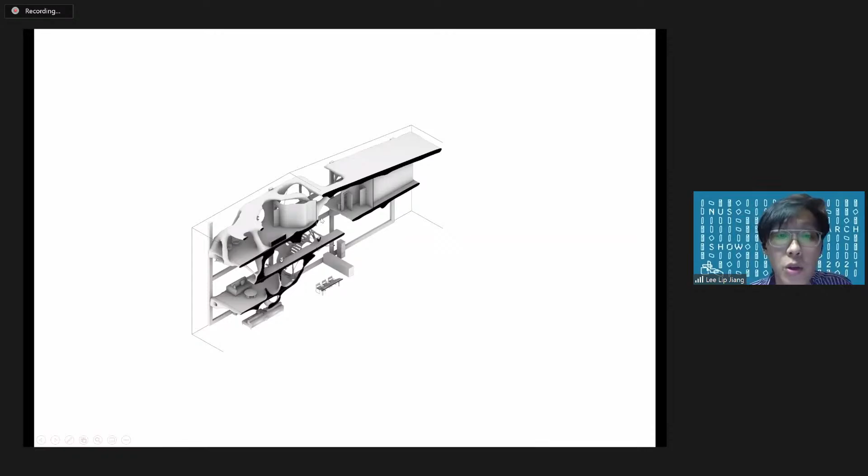Even spaces like the staircase, for example, I can set to be more detailed than the rest, so each individual space can have its own level of resolution. This is the final structural resolution of the house, and a view of the interior showing how it might be utilized.

A big question, of course, is fabrication. So I 3D printed everything just to test the tactility and its reaction to gravity, how it would hold up in space. That's the first form of testing. I wanted to do a proper load test using a hydraulic press, but I didn't manage to get a chance to access that.

Secondly, there are already very new forms of fabrication that could solve a lot of problems, and they're being tested right now. For example, split nozzle printing that allows you to print around a rebar system. Another way is welding the rebar together and then using spray crete on top of that. And lastly is cast-in-situ formwork.

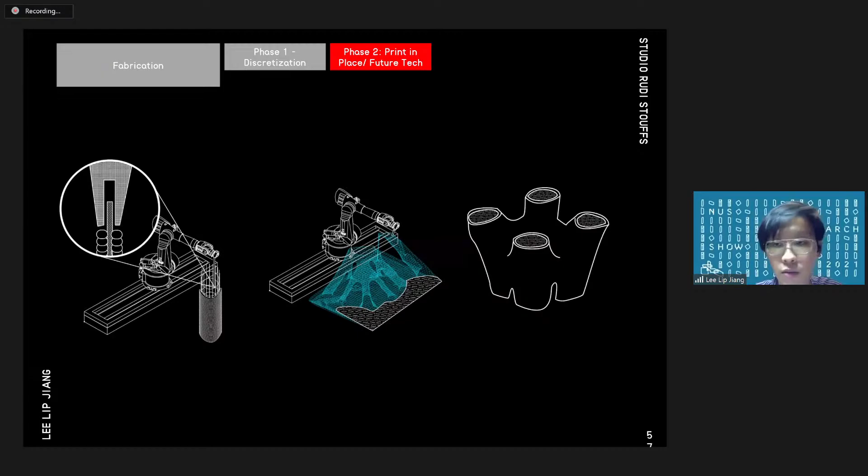So complex geometries are definitely going to be able to be produced, and the question is what to use these complexities for. My aim is to use it to reduce material.

But in conclusion, what my thesis was about was exploring the forefront of structural optimization tools and thinking about how architects could use it, so that we could think about structure, think about how to reduce material, because every line we draw means we are utilizing material. So hopefully by doing this, it gives us new tools to build better and to build using less. Yeah, thank you.